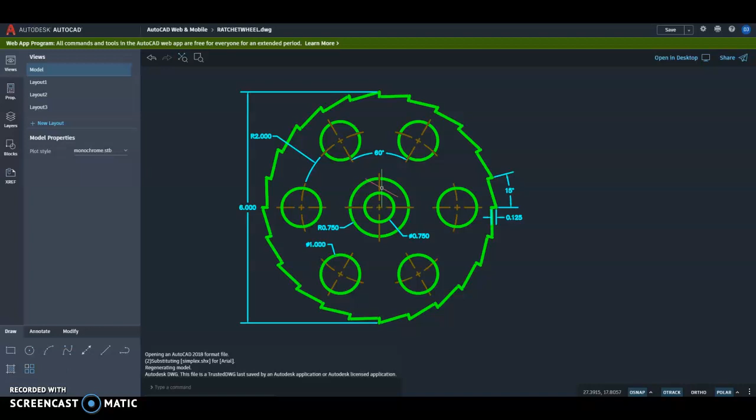Alright, hello. We are going to be drawing the ratchet wheel in this video. So quickly, just to review some of the things that we've covered in class with the dimensions. Our ratchet wheel consists of multiple concentric circles, meaning that they share center points, and then a few circles that are arrayed around the same center point. And then we have these teeth on the outside. So those are our three main elements that we have to be concerned with.

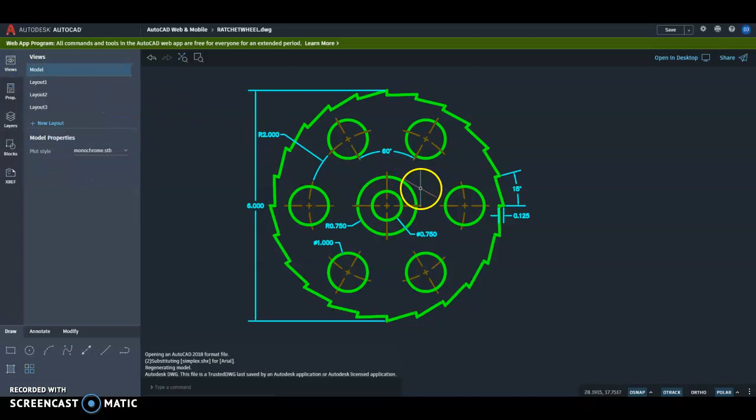So we're going to start drawing the ratchet wheel by drawing the two center circles. Now we're not going to be drawing the bronze colored center lines here or the dimensions in this video. So if you're attempting to do that, that will not be covered in this video. I just wanted to check and make sure that I'm using the correct layer. So to start drawing this, let's look at these two center circles.

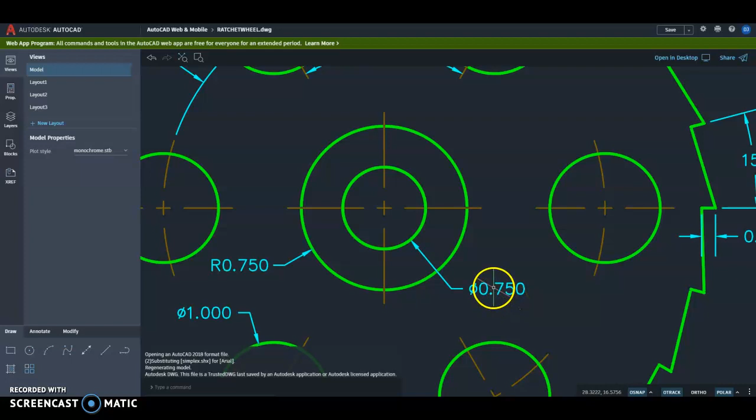You'll notice that the dimensions that are labeled on each of them, the number I should say, is the same. However, the designation in front of each of these dimensions is different. The center circle, if we follow its dimension line, the symbol in front of it is a circle with a slash through it, which indicates diameter. Another way of showing diameter is something saying DIA, of which there are no examples in this drawing.

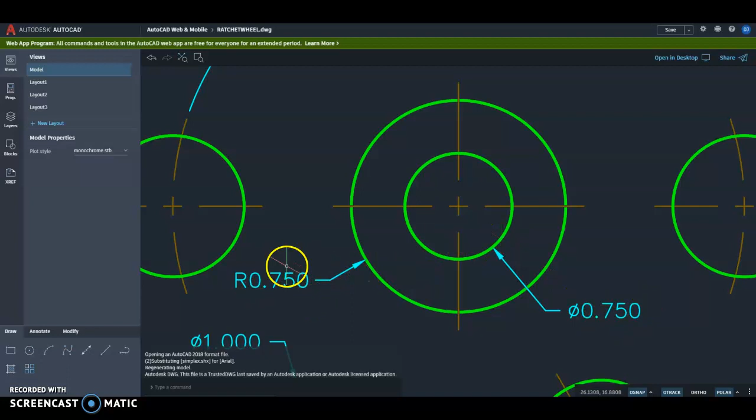The outer circle, again, same number for the dimension. However, the symbol in front of the number is actually R, and that is for radius. So that's measuring from the edge of the circle to the center, versus over here, we're measuring across the entire circle. So we're going to start by drawing those two circles. A circle with a diameter of 0.75 in the center, and a circle with a radius of 0.75 on the outside. So let's move over here.

We're going to select our circle tool. We're just going to click kind of anywhere. We're just going to type 0.75. Now, AutoCAD web app draws by default in radius. So we need to assume that this circle has a radius of 0.75. And if you wanted to double check, there's a few things you could do. One, you could grab the circle and just kind of drag it over here and be like, oh yeah, that kind of measures up to that outer circle there.

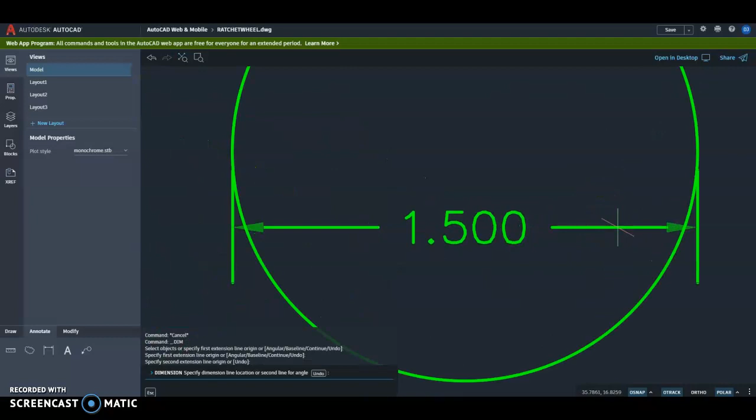Or another way to do that is go over here to the Annotate tab, click on the ruler, and just kind of jump in here and we'll see that it's giving us a measurement of 0.75. And that, again, is measured in radius. We can also use our measurement tool here and go all the way across and see that it says 1.5, so that implies that it's 0.75 times 2 because it's measuring across the entire diameter. So again, many ways of double checking our work as we go.

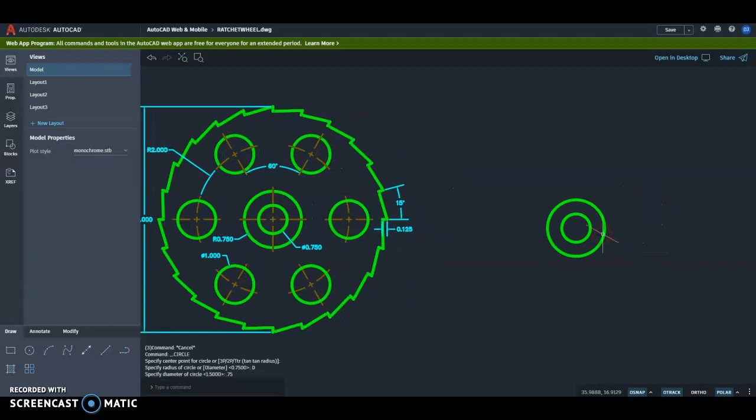We're going to go back over to draw here. We'll select circle again. And then we're going to draw our 0.75 diameter circle. So the first thing I want to do is I want to start my circle tool, and then I'm going to come down here with my mouse and click on diameter. And you'll notice that the circle is no longer touching the cursor. And we're going to type 0.75 again. There we go. Now we can start concerning ourselves with these 6 circles kind of in the middle, arrayed evenly around the center point.

So if we look at them, we're going to pull some information off of them. Number one, we kind of see this like ghost of a circle that they're sitting on. If we go all the way around here, lying on that phantom or ghost circle is a radius 2 measurement. What that's indicating is that the radius of this circle right here from this center point in the very center of the drawing is 2 inches.

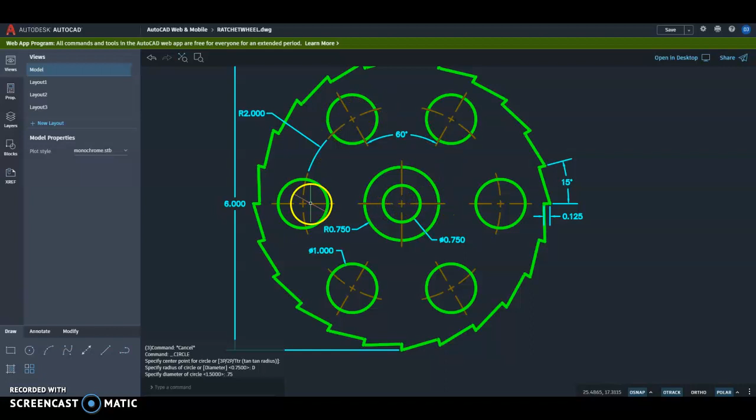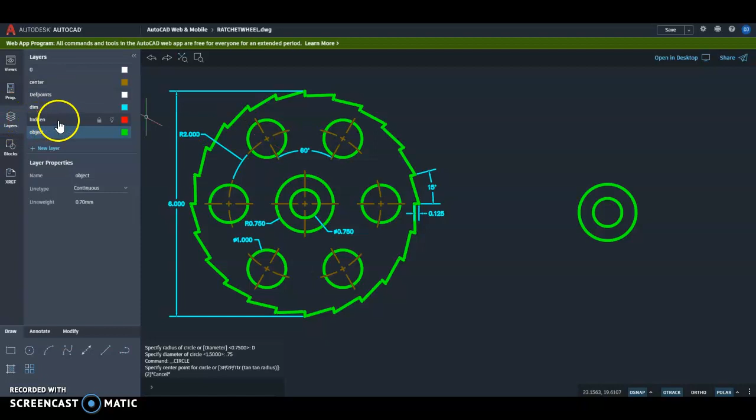So what we need to do in order to accomplish drawing these 6 circles is we're going to draw a temporary circle that will be kind of like a guideline. So I'm going to draw that circle. I'm going to change the color. When you draw it, you don't have to. Oh, apologies there. So I will draw it and then change the color afterwards. All right. So again, radius of 2.

We will come in and select the circle. We'll go to properties and change the color to, let's say, yellow. Something different.

Now we're ready to draw one of these circles. Let's look at what the size of these circles is going to be. The only dimension touching any of these 6 circles that has a radius, diameter, or width, other than an angle, is this particular dimension right here. If we zoom in, we can see it has that diameter symbol, the circle with a slash through it. It says 1.000, so these circles are 1 inch in diameter.

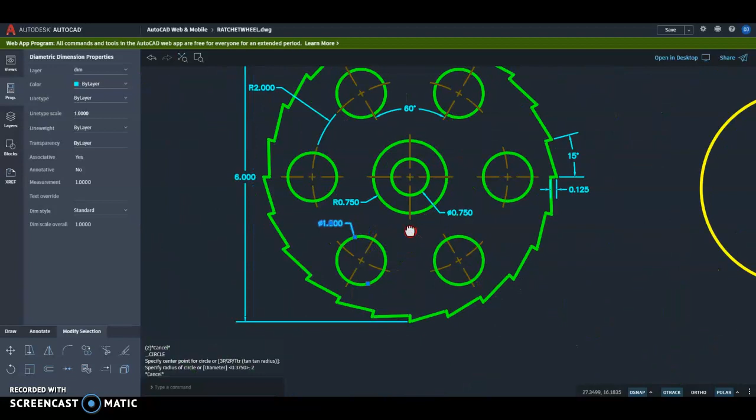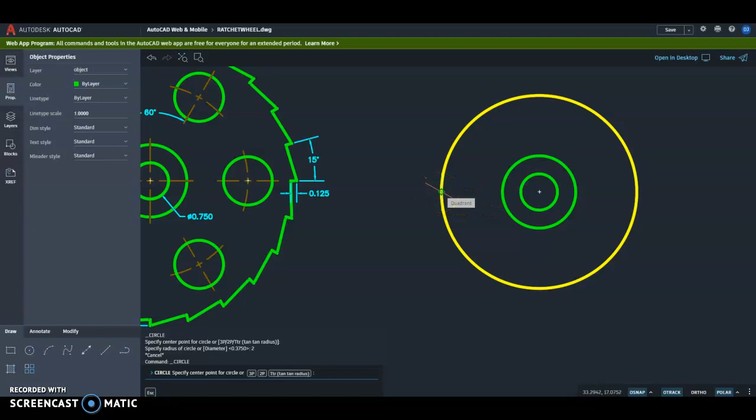Let's draw one. We want to duplicate the geometry here, so the best way to do this is to draw one to the right of our center or to the left of our center. We want to make sure we're lined up with our center point here. We'll come over here and we want to see that quadrant marker come up. We'll type D for diameter and hit enter.

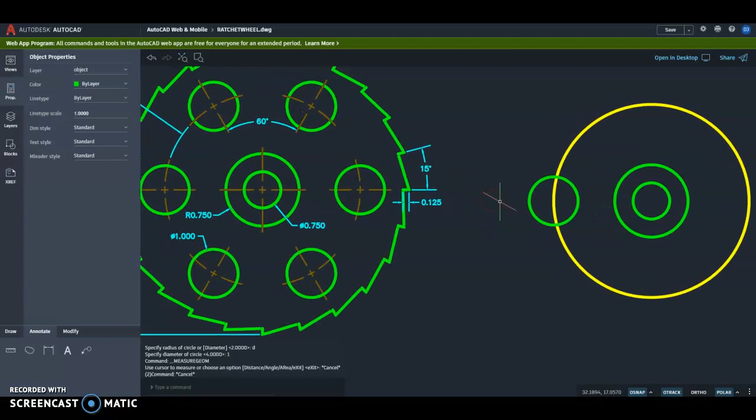And we'll type 1, and there we go. You can see that this circle is approximately the same size as this. If you're not sure, go back in and you should get a 0.5 measurement for that, indicating the radius of the circle. If you get something other than 0.5, then you know you did it incorrectly and have to redo it.

Now we can delete this guide circle. Now we want to make a pattern, an array of these 6 circles. Rather than drawing each of them individually and trying to space them 60 degrees apart with a series of guidelines, we're going to let AutoCAD do it for us.

So we're going to go into Draw, and down here is this symbol with 4 squares, and it says Array if we hover over it. I'll click Array, and then we're going to read our directions that it's giving us. Anytime you have a command that's complicated, it always helps to read the directions down here in the black box. It says Array, Select Object.

So we want to select our circle that we want to array, then hit Enter. This says Enter the array type. This obviously isn't a rectangular array because these form a circle. We're not following a path, although technically we could. Polar array implies a circular array, so we're going to select that.

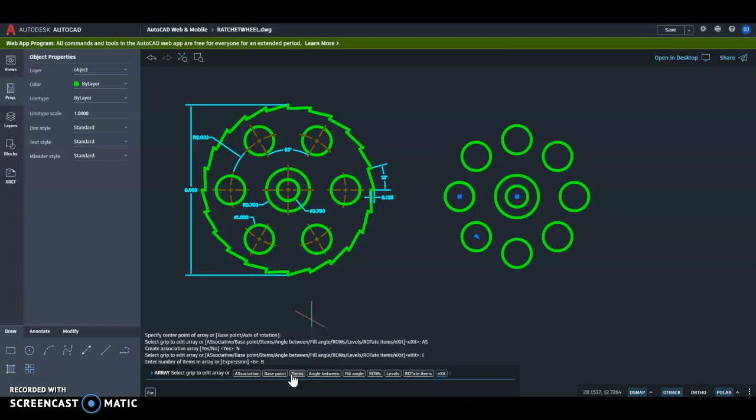A few things we want to change before we confirm this. Number one, we want to click on Associative and make sure we select No. That'll help us out down the road. Second, we want to select the number of items, and if it wasn't 6, we could change it. Say I wanted 8, we could put in 8. Obviously we do want 6 total circles, so we'll just leave it at that, and we can click Exit, and that's done. Alright, so we're halfway done.

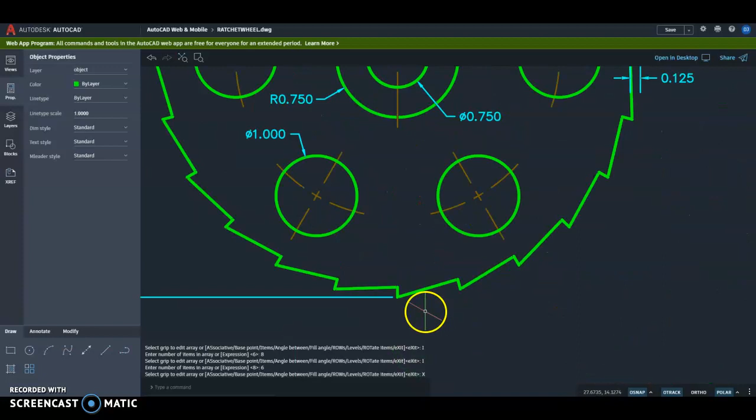Now we're going to draw our teeth on the outside, and then we'll look at what dimensions are associated with the teeth as well. Here we've got a dimension on the very outside that says 6 inches, and if we zoom in real close, we see that it's touching the very outer tooth there, and it's touching the very outer tooth there. So then, what other dimensions are touching the teeth?

Well, we've got 2 over here. One shows 15 degrees, which is how many degrees each tooth is angled apart, and then we've got 0.125, which is the depth of our teeth. I know it's a little hard to see there, but that shows the distance of that line that I've selected.

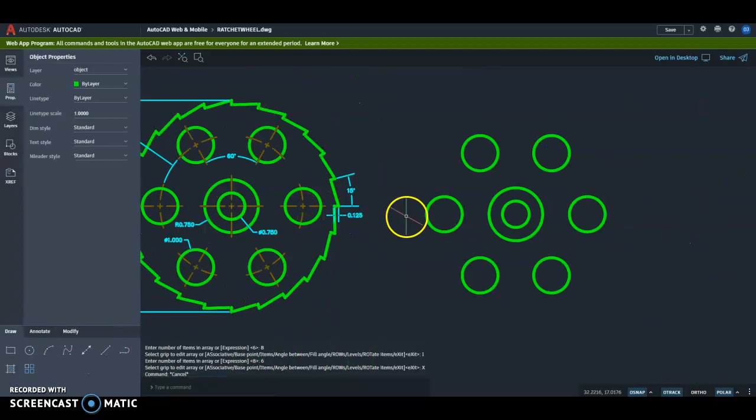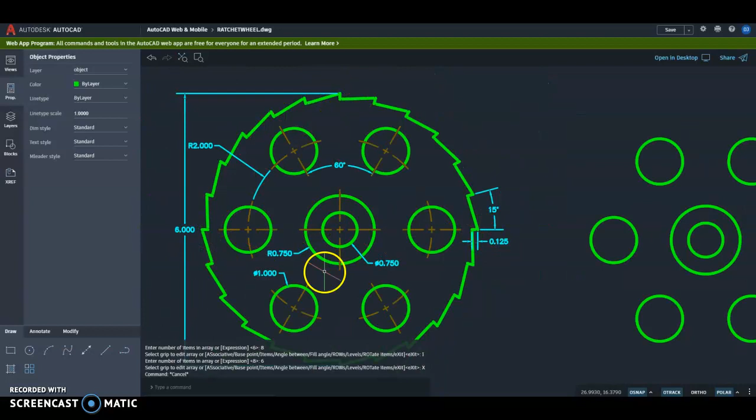So in order to replicate that, we need 2 guide circles, again temporary circles, that are going to be 1/8 of an inch apart. One of them is going to be 6 inches in diameter, and the other one is going to have 1/8 of an inch less on the right side, the left side, the top, and the bottom. So what that means is we're going to shrink the radius, not diameter, of that circle by 1/8 of an inch. We'll start with our first guide circle here.

We're going to make it 6 inches, so we're going to type in a 3-inch radius here.

We're going to draw another circle, 1/8 inch less than the last one. Rather than redrawing it, we'll go to the Modify toolbar and select Offset. Click the outer circle, start moving in, type 0.125 (1/8 of an inch), and hit enter. That gives us that 1/8 inch gap all the way around.

These are just guide circles, so I'll change the color of them temporarily. Not something you have to do, but it'll help us as we go through this process.

Now we want to draw two lines toward the center point, since the teeth all go through our center point and are 15 degrees apart.

To do that, we come down to our polar tracking option, click the up arrow, and make sure that's set to 15 degrees. Mine just happens to be already.

We'll use our line tool, start from our center point, and come out straight to the right, overshooting our guide circles a bit. Then we'll do the same process again from the center point, coming out in the same direction, then up until our angle snaps to 15 degrees, and you see that green extension line come up.

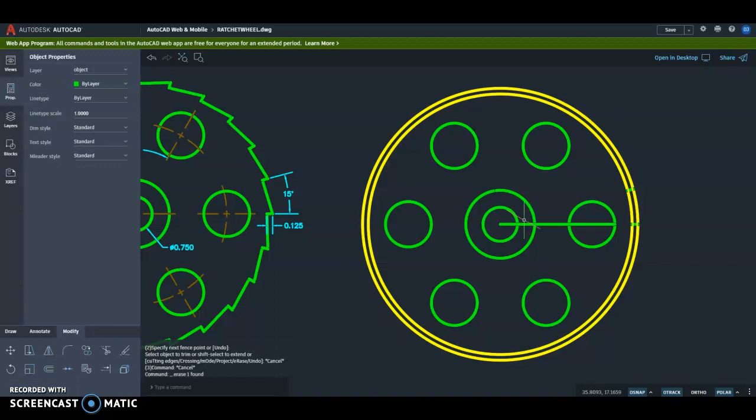That's very helpful. Now we'll trim off the excess lines. I'll select the trim tool and click and drag to get rid of the chunks of lines I don't want. There are bigger chunks here, so I'll hit escape and just delete those bigger chunks rather than using the trim tool. That leaves us with these two little line chunks, and I can now get rid of my guide circles.

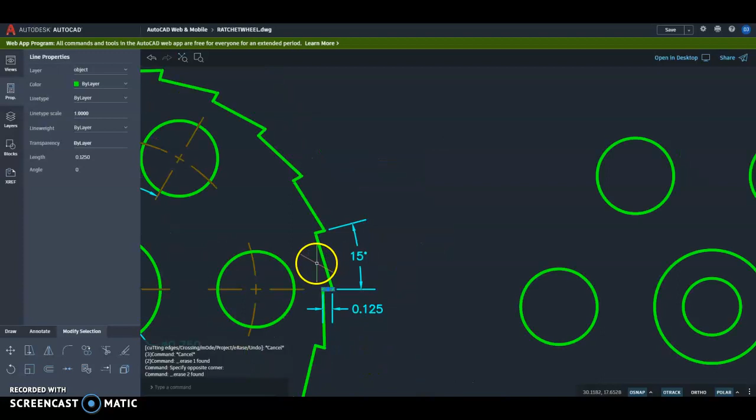Now let's look at our teeth. This particular tooth is the one we're trying to draw between these two lines. At the top it starts toward the inside of our drawing and then goes toward the outside as it goes down. That's what we're going to replicate over here.

Select a line, start on the inside, go down, go to the outside, making sure we're on the end point. You'll notice it's trying to snap at 15 degrees - that's a common mistake, so we want to make sure we're on the end of that line. Hit escape, and now one tooth only consists of 2 total lines, and here we have 3.

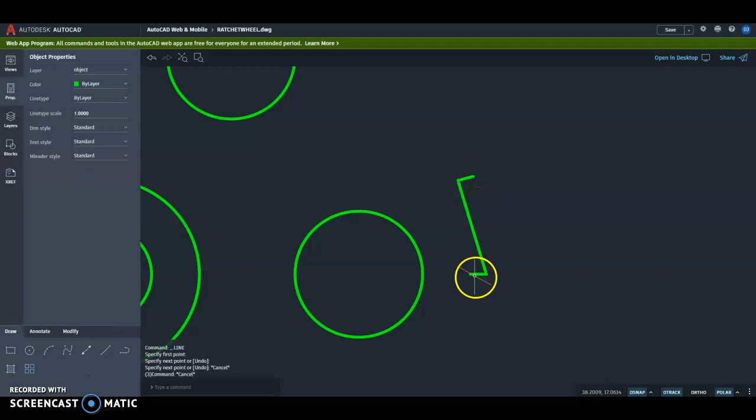If we get rid of our center line, this middle line here, we lose a major part of our teeth. So the only 2 lines that are duplicated are these 2 short ones, and we can delete either one - it doesn't really matter which.

Then we're going to repeat that array process. We'll go back to array, select objects, and draw a box around our 2 lines, making sure it's not touching anything else. We hit enter, and go through the same process again.

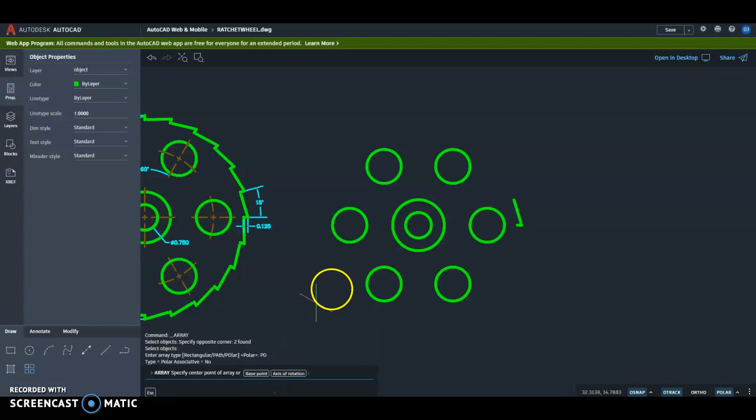Again we want a round array, so we select polar and give it a base point right in the middle by clicking the very center. You'll see it previews, but our number isn't correct this time because it doesn't look like our drawing on the left here.

We could change the angle between items or change the total number of items - we're definitely going to want to change that count. You could technically just guess and check, like maybe 15? No. Maybe 18? No. Or we can do some math.

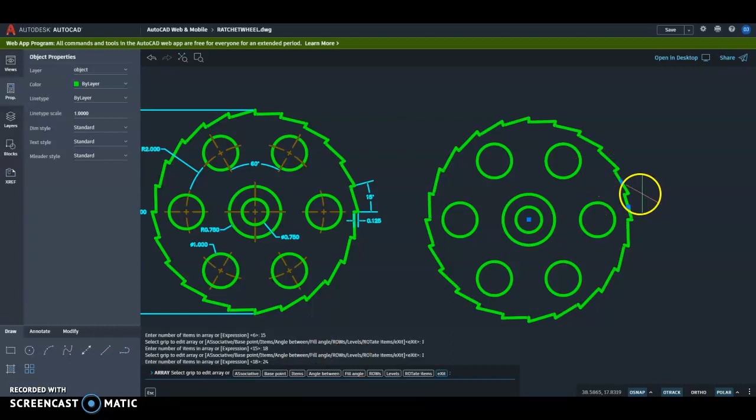We want a full circle, and the teeth are 15 degrees apart. So if we take 360 degrees and divide it by 15, that leaves us with 24 - that's our total number of items. Again we make sure it's not associative, then click exit. That's how we draw the ratchet wheel.